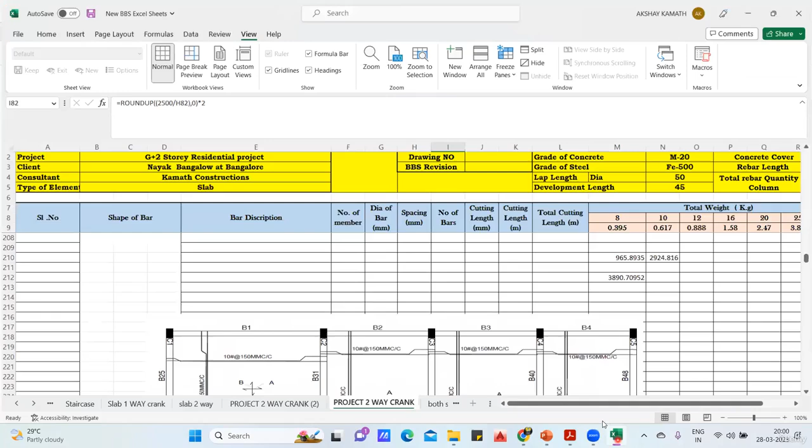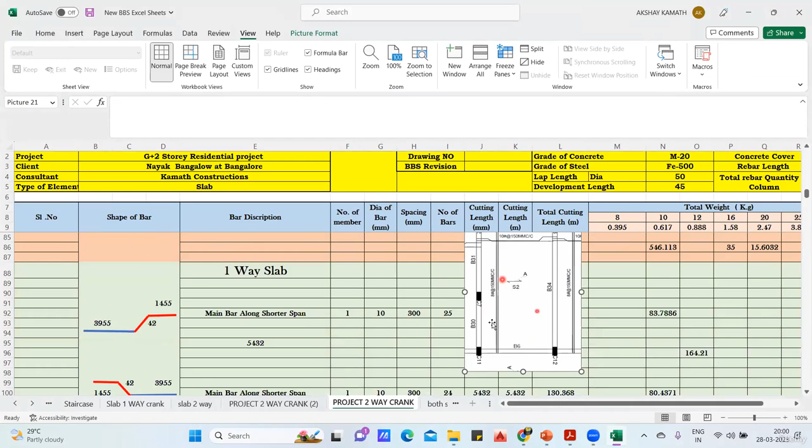So here we'll start with this particular panel. We have to find the BBS for this panel. Again, it's a one-way slab, so it's very simple. I've written one-way slab and I'll paste it here so you can take it as reference and try to do the calculation. We already done this because it is 5 meter and 7 meter, so we had done a similar problem. I'll just go in a flow now.

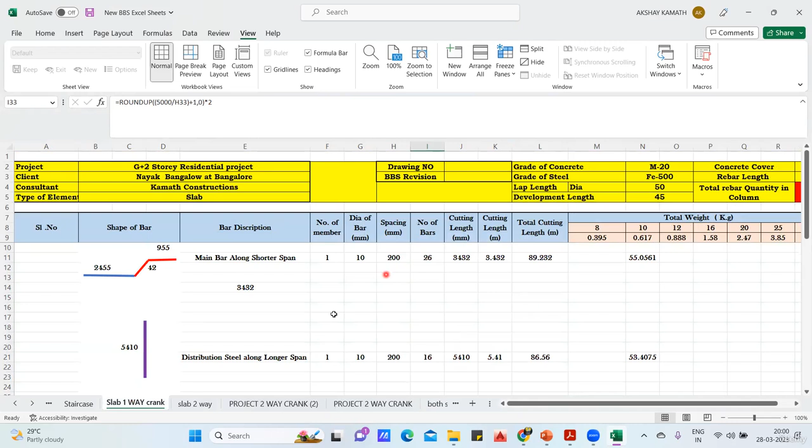This cutting length, whatever I had explained for one-way slab in the earlier case, it's the same here also. You're getting the same answer also, see, 83. Anyhow, the spacing was different in that case. Here it is 150, no problem. See, this is 3955. You know how it has come: 230 minus cover, this is 5000 minus the crank length which is 1250. If you do this, this is 3955. So this will be 42. Crank length 0.42 into D, and this is 1455.

So crank is 1250 plus 230 minus one cover I have to do. Now few people may think, sir, from here the bar has ended here, again you're starting from here, here you don't have to deduct the cover exactly. But again, we cannot go to that level of understanding. So what we do, we consider each as a single panel, and we consider that it is discontinuous edge here, discontinuous edge here. We're leaving a cover from both sides, but practically this is continuous. Your bar will come like this, take a crank, it will go like this. That is why doing a BBS for a continuous slab will be a difficult task, it's not that easy, and your project will become complicated. So that is why you break it down as a single panel and do it. 90 to 95% you are getting the correct answer. This is 1455.

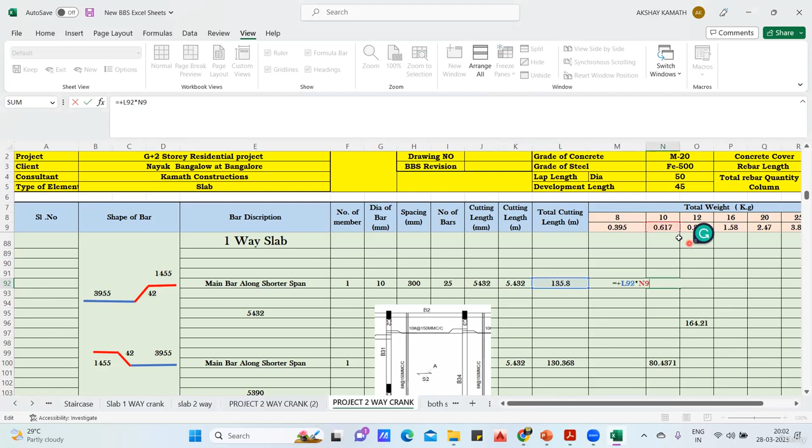So main bar along the shorter span, 10 mm dia. Here the spacing is 150, but I'm finding alternate crank, so 150 double is 300, I put 300 here. So number of bar, I'll take 7000 divided by spacing 300 plus 1. I'll get 25 number of bars. Cutting length, you add everything, add all the three, and minus the bend deduction minus 2 into D. So it'll give you 5432, 5.432. Total cutting length will be 5.432 into 25 into number of member is 1. So total weight will be 135.8 multiplied by 0.617. This will be 83.78 kg.

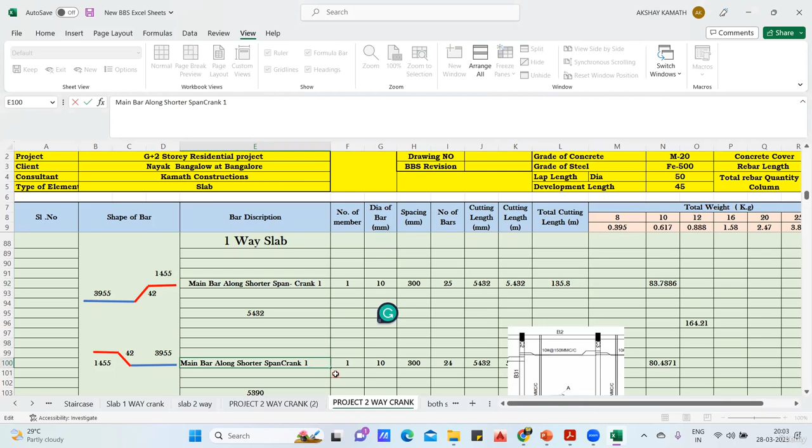Now this bar will go like this, so 25 number of such bar will come. Next bar will come like this, give a crank and take it here. So this is 1455, same thing here, 42 and 42, this is 3955. This is also 3955. I've written main bar along shorter span, you can write crank 1 and write crank 2.

Okay, fine, again number of member is 1, dia is 10, spacing is 300. Coming to the number of bar, so again same thing, 7000 divided by 300, but this time we'll not do plus 1 here because already plus 1 I've done it here. So 5432, 5.432, cutting length remains the same. So this is 5.432 multiplied by 24 into 1, this will be 130.368, and 130.368 multiplied by 0.617, this will give me 80.4371 kg of steel you will be getting. So this is alternate crank 1, crank 2.

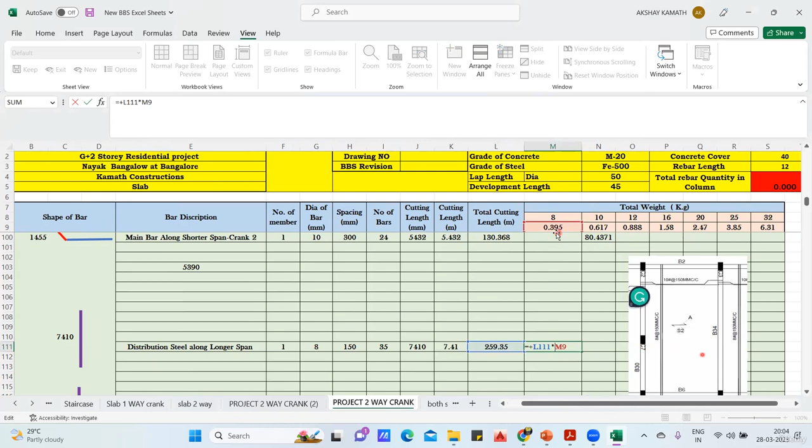Now, since it's a one-way slab, the next bar is the straight bar, that is a distribution steel. So again the cutting length will be 230 minus cover plus 7000 plus 230 minus cover, same thing I have done. 7410 is the cutting length, so it's written distribution steel along the longer span. Number of member is 1. This time the dia given is 8 mm, so I've written 8 mm, spacing is 150. Number of bar will be, take 5000 divided by 150 plus 1, we get 35 number of bars. So cutting length is 7410, 7.41. Total cutting length will be 7.41 multiplied by 35 multiplied by 1, will be 259.35 running meter. Since it's an 8 mm bar, 259.35 multiplied by 0.395, this will be 102.44 kg of steel is required.

Now comes the crank distributor. So crank distributor, your crank is only this portion and this portion. Since it's a one-way slab, we'll be putting a crank distributor only in this direction.

Cutting length of your crank distributor and cutting length of your distribution steel will always be same. So I've written crank distributor here. Crank distributor both side is again 8 mm bar, 150 spacing. It is never mentioned, but whatever you are putting on the longer span, that is 8 at 150, same will be your crank distributor. So 8 at 150.

Now come to the number of bars. This will be L by 4. So 5000 divided by 4 will be 1250. So 1250 is the length where your crank distributor will come. Divide by spacing 150, plus 1, I get 10 bars on left side. Similar on both sides we are doing, so I'm multiplying it by 2. So 20 number of bars is required.

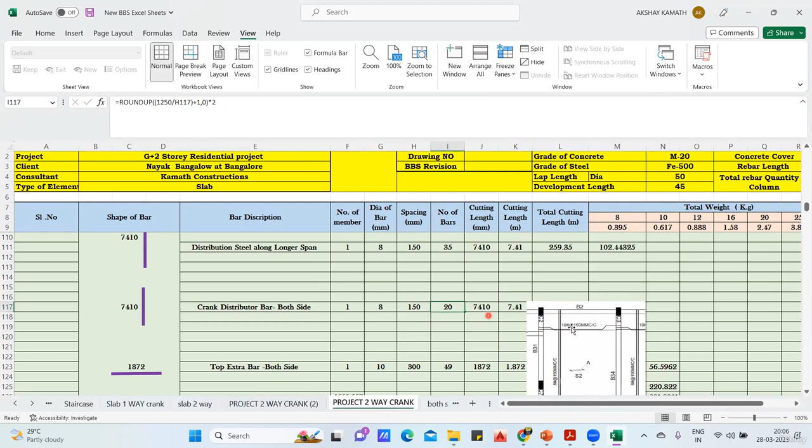So now 7.41 cutting length. So 7.41 into 20 into number of members, this will be 148.2, and 148.2 multiplied by 0.395, this will be 58.539 kg. Okay, fine, so crank distributor is done.

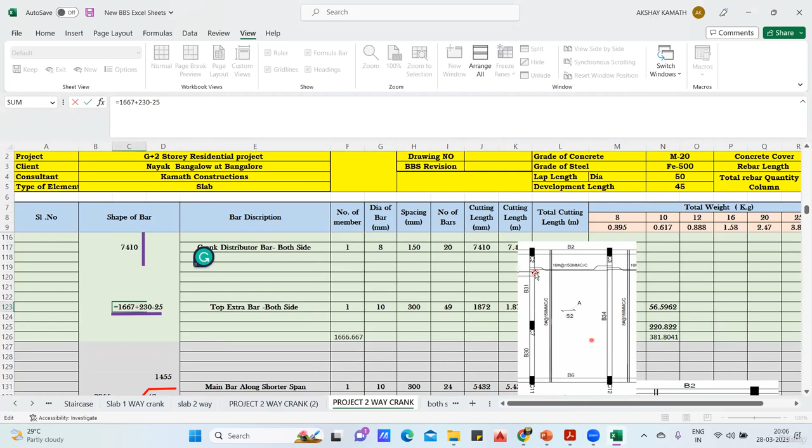Now last what is left is top extra bar on both the sides. This will be a top extra on this side and similarly on this side. So what will be the cutting length of that? This is how you will put the top extra. Here one small change is done, not required, will not make confusion, so it is 1250 only.

So top extra will be how much? This is 5000, 5000 divided by 4, how much it is? 1250 plus 230 minus 25 I have done.

So now the spacing is 300, because your main reinforcement what you had provided was at 150, since the alternate, but actually the main reinforcement is being put at 150 center to center. So that is why top distribution I'm putting at 300. Okay fine, you're getting my point, no?

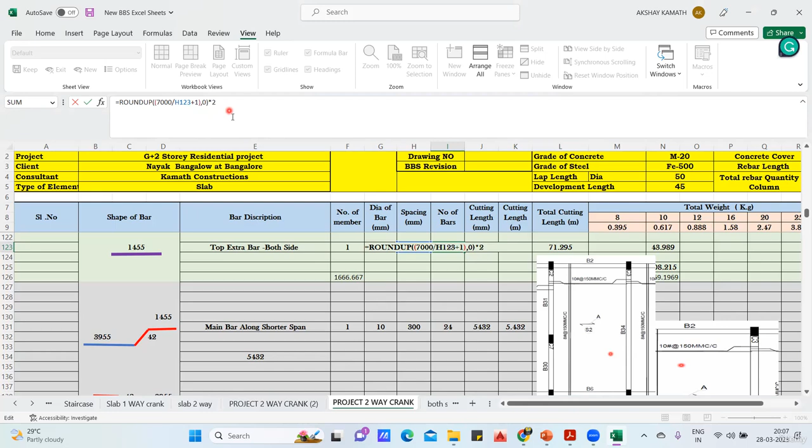The number of extra bar will be round up. This length is 7000, divided by 300 plus 1 I have done. Plus 1 I have done. So how much I'm getting? 50 number of bar is required.

I always told you, whatever is your main bar, same will be top distribution bar, top extra bar. See, your this crank was 25, this was 24. So 25 plus 24 is 49 number of bars you'll get. But here you are getting 50. So you know that however many main reinforcement will come, that much only top extra will come.

But since we are rounding up the values and all, sometimes one extra you'll get, sometimes not all the time. So in that case, you can directly do -1 here, not an issue, you'll get the right answer. That you do, -1 here. Okay wait, getting 50, you do -1, let me see. Yeah, you get 49. Why did I do -1?

Because I know that my shorter span, 25 plus 24 is 49 number of bars will come. So that much only my top extra will come. But here due to the calculation, it is showing 50. So I did -1 so that my calculation will not be a little overestimation. But if you don't do it also, nothing will happen. If you see the difference - if I do -1, I'm getting 43.989. And if I don't do that minus, you see what difference you're getting in the steel - you're getting 44.888. The difference is hardly how much, you tell me? It's just 0.90, so that doesn't make any difference.

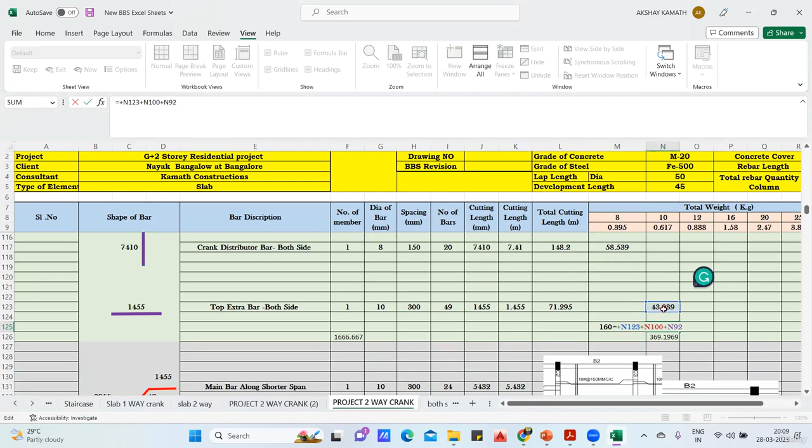Getting my point? Fine. So in this way, if you ask me what is the total reinforcement that will come in this one-way slab, I've done the calculation. It will be roughly... 369 kg of steel is required, because 8 mm you require 160 kg and 10 mm you require 208 kg. So both together it will be 160 plus 208, in one way slab roughly 370 kg of steel is required. Got it?

So in this way, the second panel also I have completed. Now in the same way, since I told you this length and this length are same, I mean this is 5 meter, this is 7 meter, this is also 5 meter plus this is 7 meter.

Similarly, this is also 5 meter plus this is a 7 meter. And all the three, you see the one-way slab, one-way slab, and one-way slab. 10 dia at 150, 10 dia at 150, 10 dia at 150, 8 at 150, 8 at 150, 8 at 150.

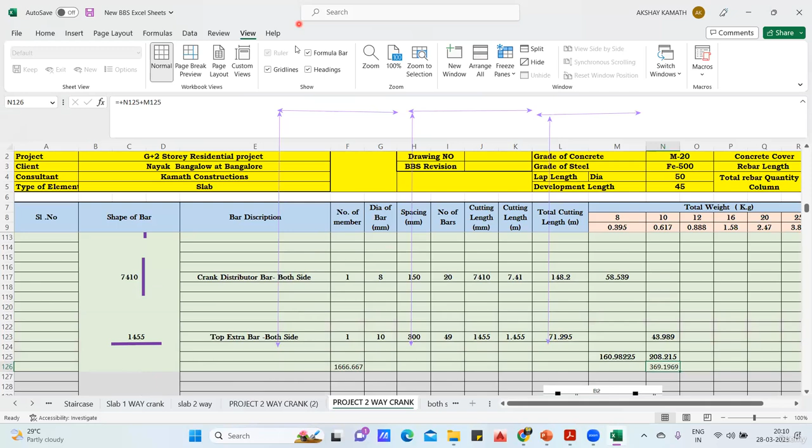Since everything is same, you don't have to do the calculation again. In the number of members, you just multiply this by 3, you get the total answer. If I put number of member 3 everywhere, you get the answer. Okay, so that is a smart work.

Instead of doing it again another 2 times, but anyhow, I have done and kept it. But my answer is also same. I'll show you that also.

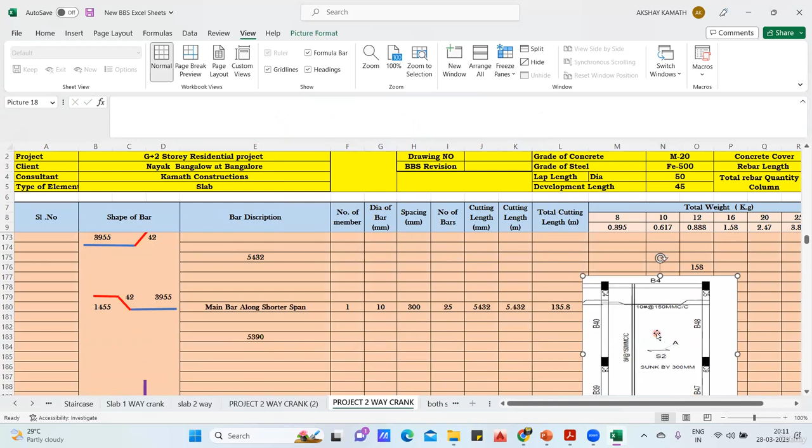If you see here, we got 369 kg. You see here, 370 kg you are getting. Okay, here also you see same thing you are getting. 381 kg. Okay, it's not actually 381 because here's one change I've done that I'll tell you what I've done.

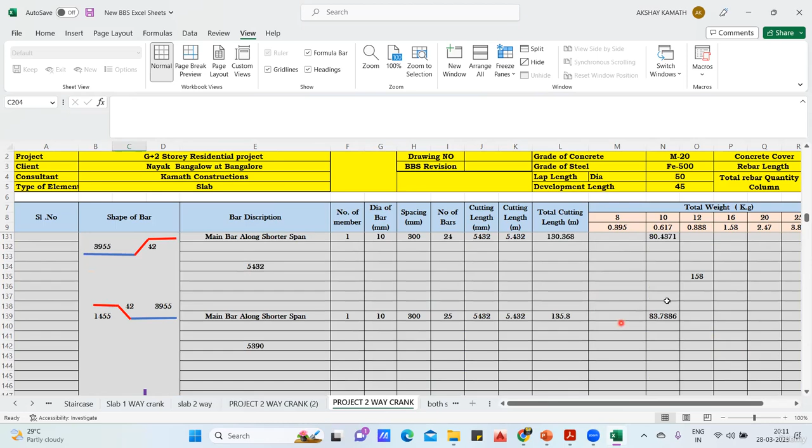369 you got, no? Here 370 you got, no problem, almost same you're getting. Slight here and there one value may come because of this top extra. That value is, I have to do minus 1 here. I'll see, 369 you got here. This 50 is coming, this also 369 you got. This also 369 you got. And this by default 369 has come, no, same thing.

But I have done it 3 times. To do it in a smarter way, you can multiply it by 3 and you can get it done. Since I wanted to explain each of the BBS, that is why I've done this. Got it, no? Now I've explained you for this 4 panel.

Can you not find for the other panels on your own? Can you not find for this? It's a one-way slab, it is mentioned here. It's shown one direction, same thing you do. This will be a breadth and this will be a length.

Now you assume your own values because in this drawing the values are not given. You assume your own value. Let us say this is 3 meter and assume this to be 6 meter and do the calculation. Can you not do that? This is a two-way slab. So assume this to be 4 meter, assume this to be 6 meter and do the calculation.

Okay, each panel you take it out separately, no problem. Each panel you take it out separately and follow the method what I've explained. Outer to outer minus 1 cover. I mean, outer to outer you take minus 1 cover from here, minus 1 cover from here too. Outer to outer you take minus 1 cover from here, minus 1 cover from here you do.

You get proper answer, 90 to 95% whatever answer we are getting, same thing we are going to match on the site also. Okay, that much amount of steel only will come. Understood, no? So in this way, the crank bar BBS has to be done. Got it?

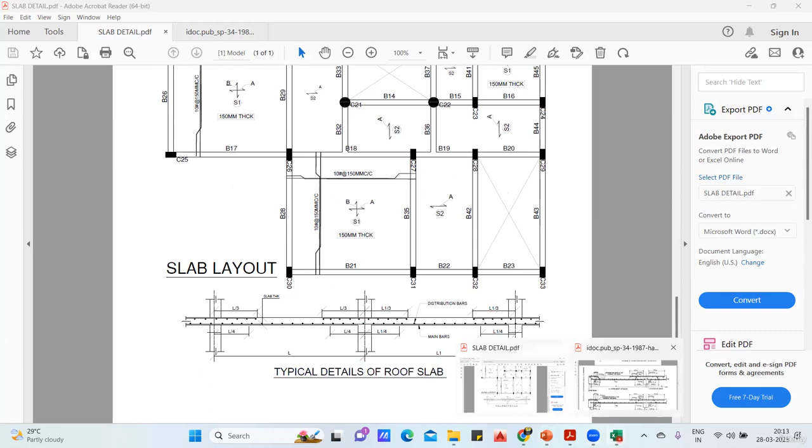Now the most interesting part is that here in this particular drawing, these people had given your top extra as L by 3, but I consider everywhere L by 4 for my easiness. Okay, suppose if I want to take this L by 3, then my calculation will be little difficult. Not difficult, but so much of changes I should have been doing. Okay, so not required, but since I'm explaining you how it has to be done, I hope you have this much understanding.

But anyhow, let me put it in a better way. For example, my clear span was 5 meter, isn't it? This was 5 meter. But here, these people are telling that L will be from this center to this center. So in that case, your L won't be 5000 because of the width of this beam.

See, this is a beam width or let us say column. This beam or column measurement is telling you to take center from this center to this center. So what will be your length? Let us say if this clear span is 5000, what will be the L? So L will be actually how much?

This is 5000. If this is 230, width of your beam or column is 230, this is also 230, what will be L? So this will be 5000 clear span plus I want this distance, I want center to center. If 230 is a width, half of that you take. Half of 230 is 115. 230 is complete, half of that is 115. So 5000 plus 115 plus 115 I'm supposed to do, right?

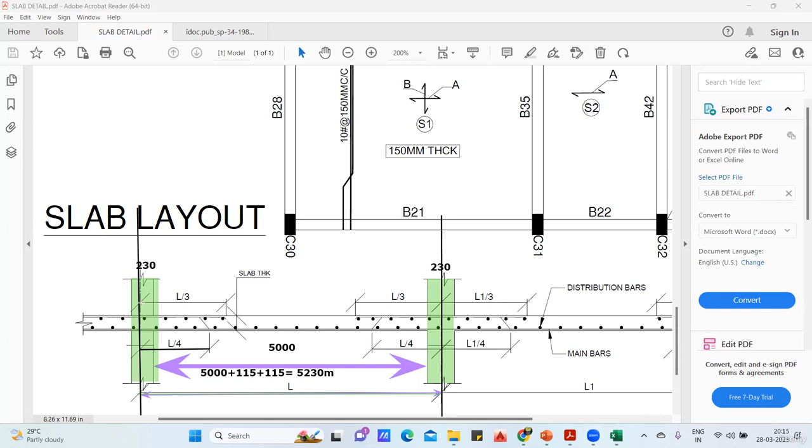Getting my point? So now, based on that, you try to do L by 4. So this L by 4 also is telling you to take from center only, L by 4. Your top extra also is telling you to take from center. So can you tell me, if my L is 5230, what will be this L by 3 then? This L by 3, so this L by 3 will be how much? Simple, 5230 divide by 3 you do. Tell me how much it will be. You getting my point, no?

It will be 1744, I'll take 5230 divided by 3. So this length, whatever crank or top extra bar you are going to put, whatever you are supposed to put from here to here, this will be 1744. Earlier case, what was happening? Earlier case, I was taking this as L by 4 and I was getting 1250, 1250. But that was 1250 I was taking from here to here. But according to this drawing, 1744 will be from here to here.

Again, the small portion is left out, this one. So this will be 115 minus 1 cover you are supposed to do. Getting my point, no? So that is how you are supposed to do.

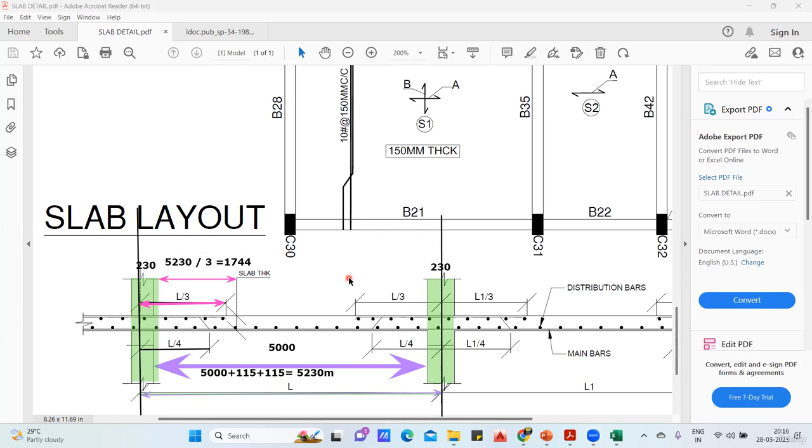So again, if I explain you this, then it will be too much tedious work for me. I mean, since if you're understanding it for the first time, it will be difficult for you. That is the reason I made it very simple by saying that my crank length and my top extra are at L by 4 and L by 3, and in my drawing both are being given from the face. From the face it is L by 4, from the face it is L by 3, L by 4. But in this drawing it is given from center to center. Based on that you can do center to center calculation.

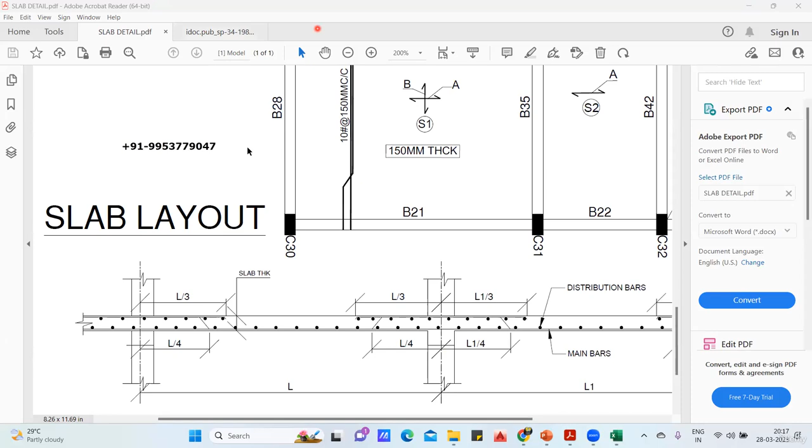If you're able to understand, try to do one panel, try to do for this panel and see how much difference will come in your answers. Okay, take this as panel. You already know the clear span is 5000, this is 7000, and beam width is 230. L, instead of taking 5000, you take L from center to center, which will be 5230. Just now I have shown that 5230, and your calculations will be according to that.

So L by 4 will be 5230 divided by 4. So your crank length will be that much from both sides. I'll do that. Crank length, if it is L by 4, 5230 divided by 4, so it will be 1307. So this crank length, whatever you had, this bar will come like this. This bar will come, get a crank like this, go like this, right?

So this crank length, we used to get 1250 according to our L by 4 calculation, which we were taking from the face. Now this crank length will be from here, from the center, from this center to this crank length is how much? 1307. Now it is 1307.

Okay, and if you ask me what is the total cutting length of this, so it will be 1307 plus. See, already you've taken from center to center, this is center to center, center to center. Okay, from center to center. So again, if this is 230, half of that is already taken care, 115. Remaining is 115 minus 1 cover you are supposed to do, plus 115 minus cover. So this will be the cutting length now.

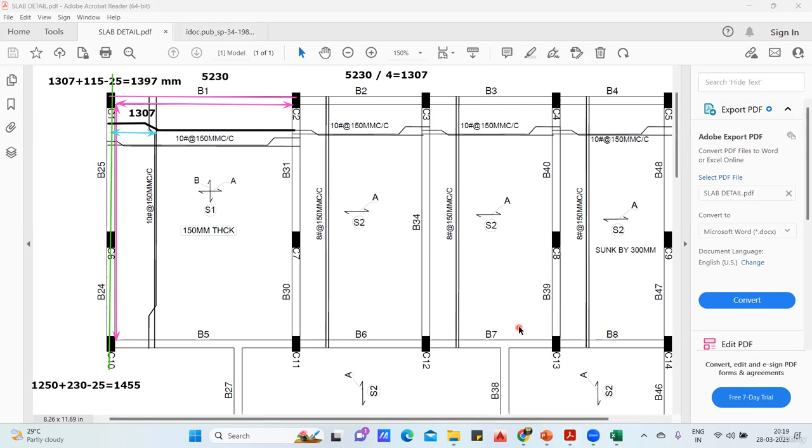Got it? I hope this much understanding I have given you. Rest, you are smart enough to do it on your own. Try to do this calculation, because I cannot take all the projects and explain to you. But whatever difficulties you may face in your projects, I have given you how it has to be done. So try to do that.

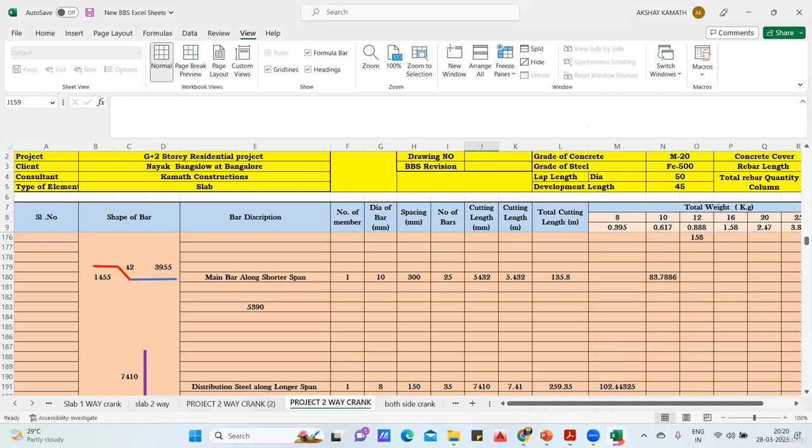That's how the entire calculation has to be done. I hope you have enjoyed the lectures up to here. Similarly, you see here, the last portion is a crank.

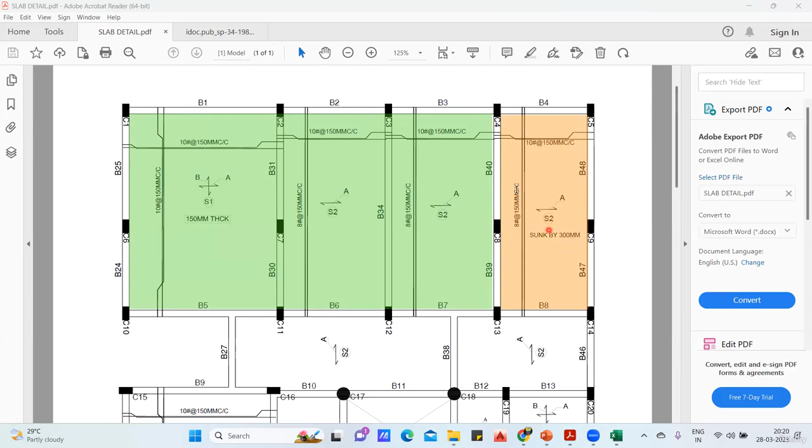This is a sunken portion. Sunken portion means whatever slab you have up to here, that slab will be at one level, whereas your sunken slab will be down. That means this slab level will be different. How much different? It will be lowered by 300 mm. That means if this is the level of the slab, from this slab it will be 300 mm down.

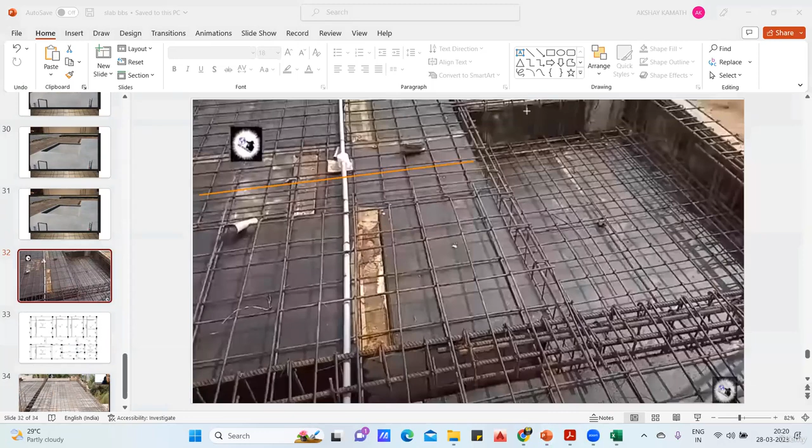So practically, if you ask me to show that, I'll show you practically how it looks. So this is that sunken portion. See, this slab, they have given it up to here, so this is the sunken portion, sunk by 300 mm.

So from where did I get 300? It will be mentioned in the drawing. Sunk by 300 mm, so this is sunken. It's a toilet area, that is why, so that your plumbing pipe and all will come there. So this is sunken, and for this you do a separate BBS.

Same thing, it's a one-way slab, you know how it has to be done. You take a bar from here, give a crank, it will go like this. Similarly, from here your bar will come and you will give a crank like this.

It's a one-way slab, so the other side bar will be a distribution steel. You know how to find all these things now, isn't it? It's very simple. So that is how practically these sunken slab portions are done.

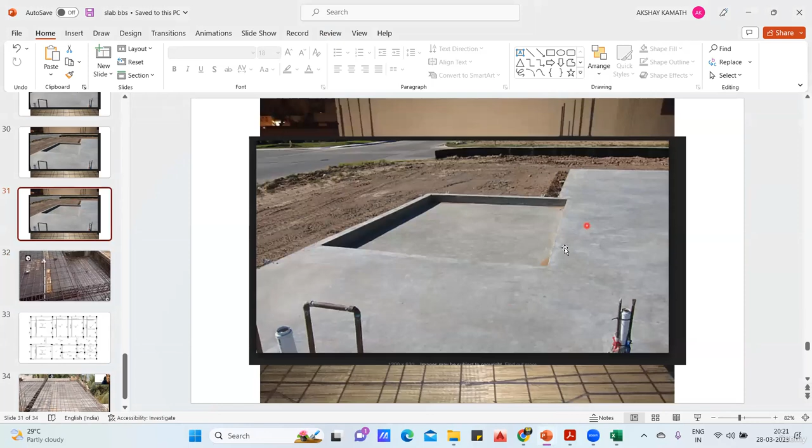Getting my point now? Once you do the concreting, practically it will look like this. See, this is your floor level, this was your toilet area, and this depth you can see, this will be 300 mm difference. Later your plumbing pipe will come here and you are going to keep the Indian commode and all, that is why we do that.

After that, you are going to do the brick bat filling, or the lightweight bricks filling. And finally, once you put the tiles, from this level there will be a difference of 50 mm, because this is a toilet portion. When you pour water in the toilet area, it should not splash into the floor area.

That is why this floor will always be like 50 mm down. When you put the tiles, it will be 50 mm down. Okay, but right now it will be sunk by 300 portion, so that you can take your plumbing lines and all. Got it?